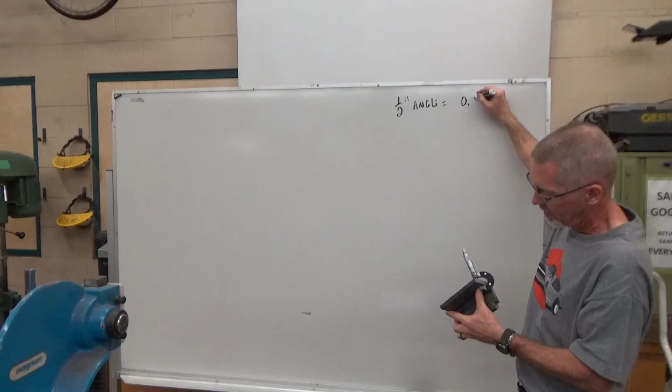It's 0.512, so it's a little bit bigger than half inch. If you measured with a ruler, you'd say that's a half inch, and if you're just welding stuff together, consider it half inch. But if you wanted to machine this, it will not fit in a half inch slot because it's too big.

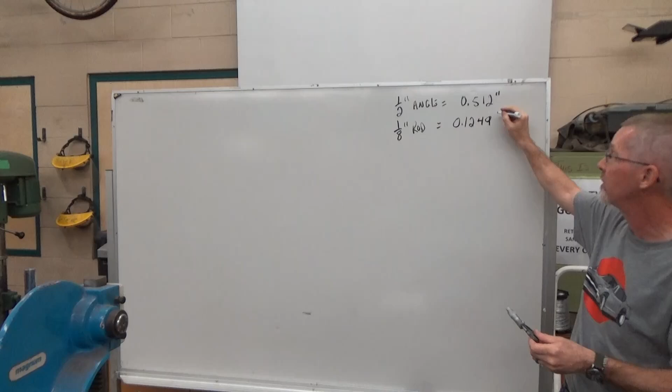So if I'm measuring this, oh man, despite having an anti-rusting kind of copper coating on this, so this is 1/8 inch rod, and it measures to be 0.12... oh man, if I go to decimal places, 4, 9, so almost 0.125. It's just a hair smaller. It'll probably fit in an 1/8 inch drilled hole fairly well.

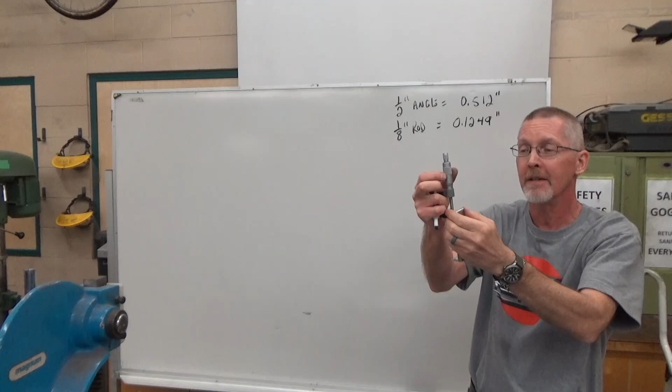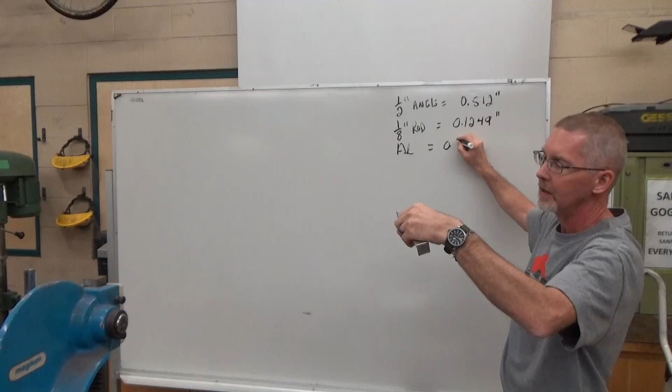Got a piece of soft jaws. You guys remember making the soft jaws in metalwork level 1, if you took metalwork with me. Put this on here, we'll see what this is. This, I think, is 90 thousandths, and it measures... no, it's 75. Okay, so aluminum, we got 0.064 apparently. 50, 64, okay, a little bit smaller than I expect.

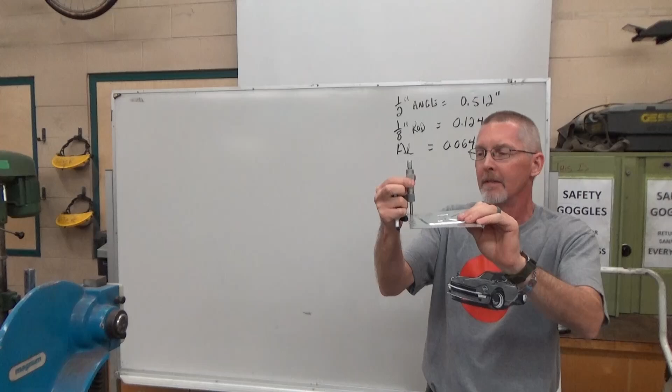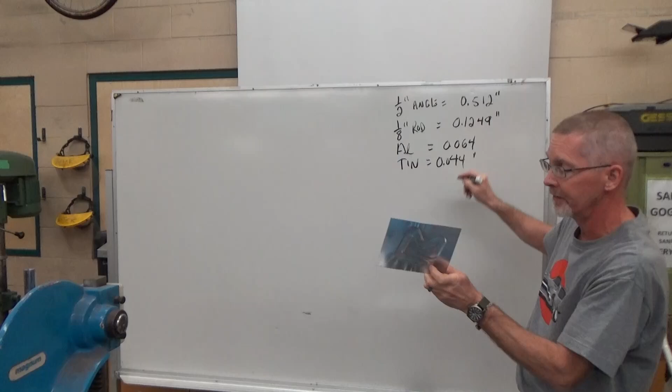Got a piece of tin, same stuff from the pencil case that you might have made in metal 8 or 9, depending on what grade you're in. Let's see what this one is. And this is 25, 35, 40. So tin, 0.25, 30, 45, 044, assuming I'm measuring that correctly.

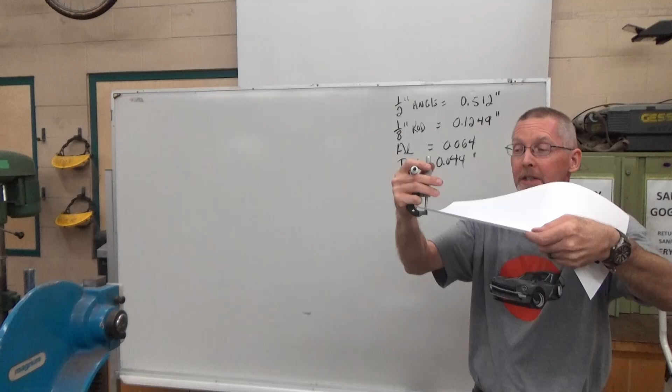Let's check this piece of paper. Paper seems pretty thin, can we measure it? You gonna be able to measure it accurately with a ruler, the thickness of this piece of paper? I think not. And this is 0.003. Now, there's high quality paper which might be thicker, and there's probably some thinner paper that's not so good quality. 0.003 of an inch, okay.

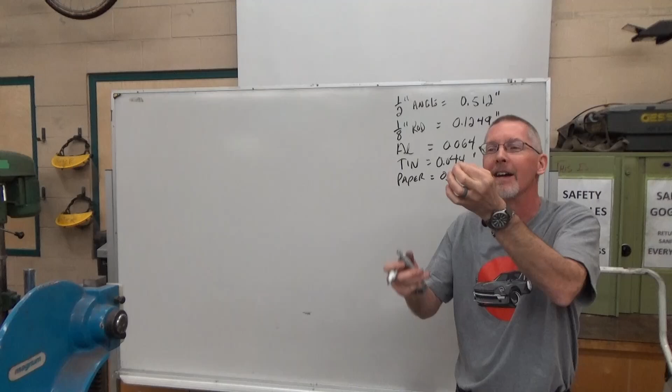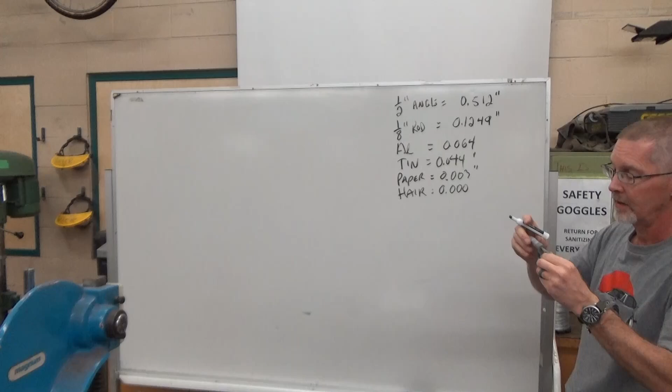Hair from my head. Oh, that is a small one. 0.000... unless this thing is not accurate. Seems pretty small. I'm not sure, is this thing even zero? Oh, this is actually off a little bit, my apologies. So that's 0.0013. Now, we want to measure, or we want to understand how this thing is going to work.

Before we get into that, let's take a look at these numbers. Oil clearance is inside your engine. When your engine's running, you can't have pieces touching. There has to be a little bit of a space, and we're going to cushion that with oil. We need to have some kind of space.

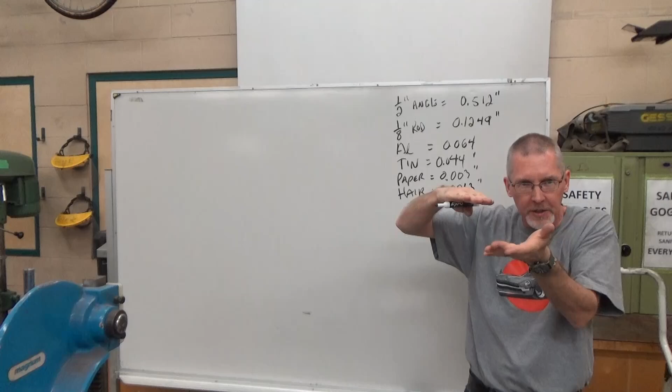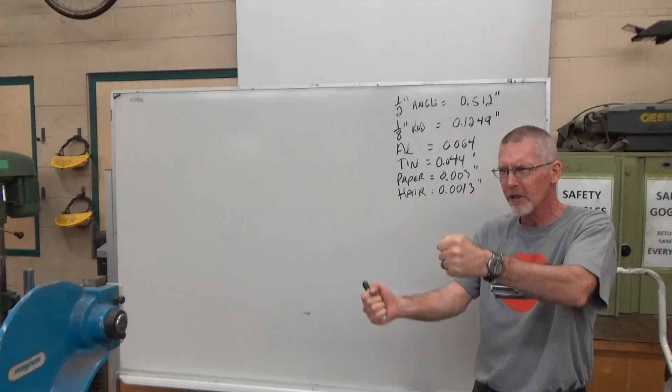Who's got a driver's license and has driven in the rain and hit a puddle that's a little bit uncomfortable? Have you guys experienced hydroplaning? So you're ripping down the highway, you hit a puddle and your car goes woo, and your butt just kind of puckers right there, right? What happens is your car's going fast enough, the water starts to build up under the tires and it lifts the tire off the ground. You have not experienced hydroplaning like slicks in a puddle of water, because it's like if you snowboard and get that fresh powder nobody's ever been in and it's like riding a cloud. That's what hydroplaning and slicks is like. You just suddenly go sailing away, and you wait until you wash ashore, figure out where you beached, and try to get back on track. It is sketchy.

So keep an eye on your tread of your tires, make sure you have tread that gets the water out of the tread.

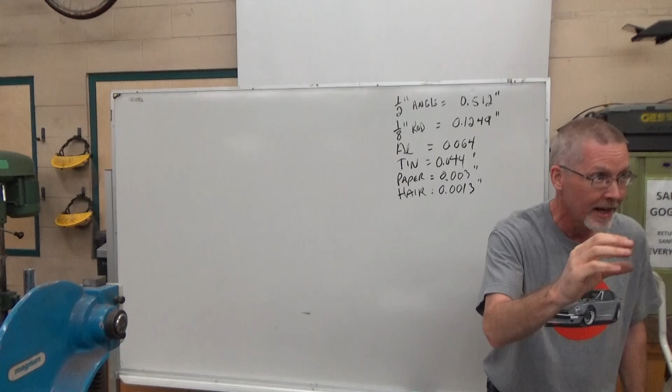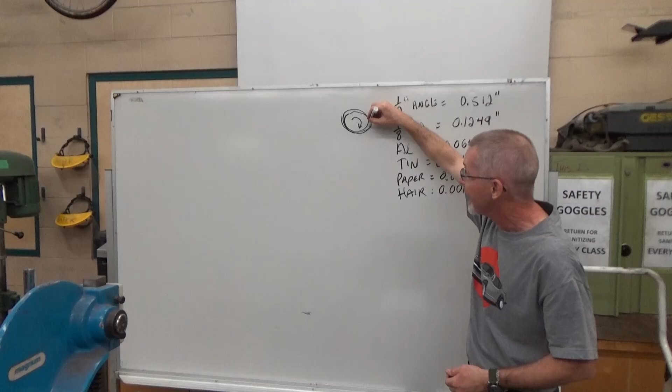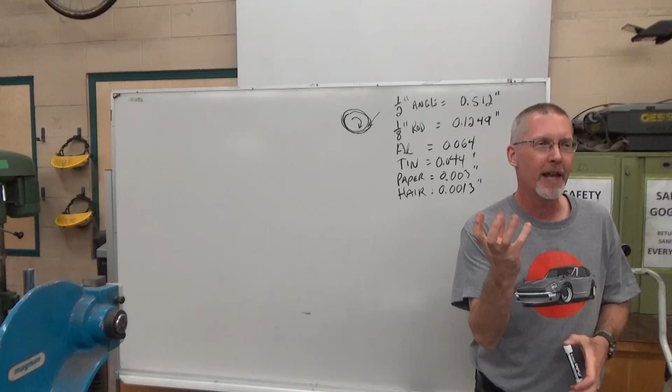Inside our engine, things are essentially hydroplaning. You'll have a shaft that is rotating, and it needs to fit somewhere. Inside here, we want to have some oil, so the whole thing hydroplanes on a coating of oil inside the motor. That's what we're shooting for. If that gap is too big, we don't have a good oil cushion and it may not hold the oil in. If it's too small, things can go wrong.

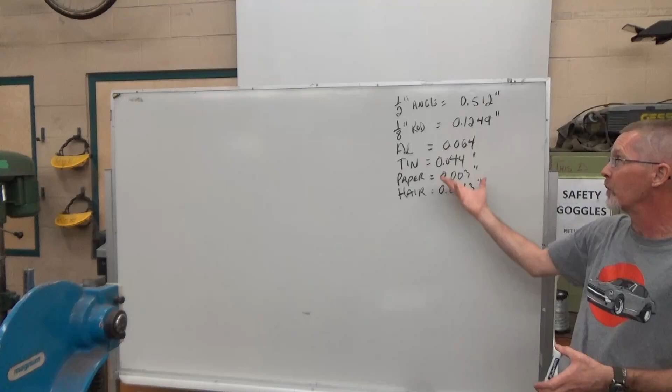For you guys in level 1, how big do you think the thickness of that oil cushion inside the engine could be? We've got a bunch of different guesses. How big are those oil clearances inside a motor? Around the thousandths of an inch. The oil clearances on engines are in this ballpark, 1.5 thousandths or so.

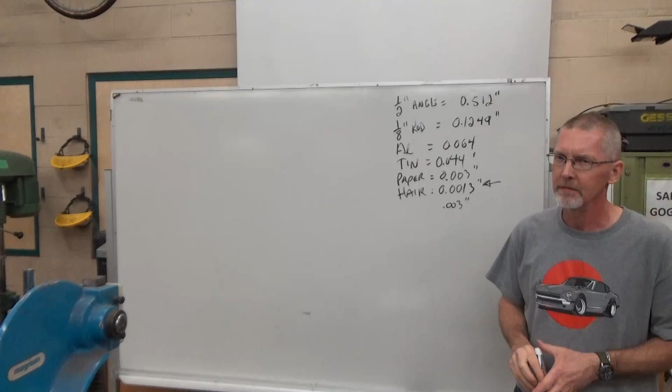In the world of old school Chevys, 0.003 is junk, it's kind of done, it needs a rebuild. In the world of Dodge, even old school Dodge, which surprises me, what's a little bit tight for a Chevy is like kind of loose for a Dodge, which is a little bit weird. And Japanese vehicles have a little bit more fussiness.

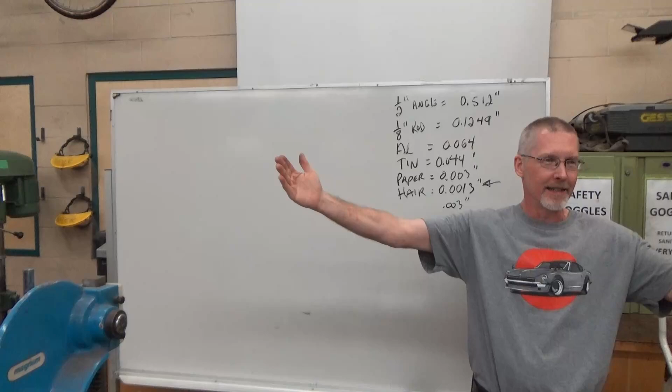If you talk to Riga, he used to have a Lada, a nice Russian Jeep from way back. He took it to a mechanic, and the mechanic said, look at these specs, normal vehicles this is too tight, this is too loose. And Lada's like, she's good, man, put vodka in there. It's amazing.

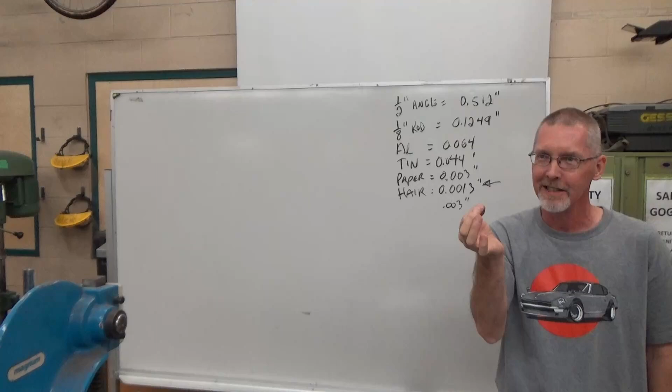So this is kind of what it wants to be. The hair on my head is about the thickness of the oil clearances inside our engine, and all of a sudden that doesn't seem like a whole lot. So you want to be changing your oil on a regular basis so you don't get crud and carbon plugging up those spaces inside the journal.

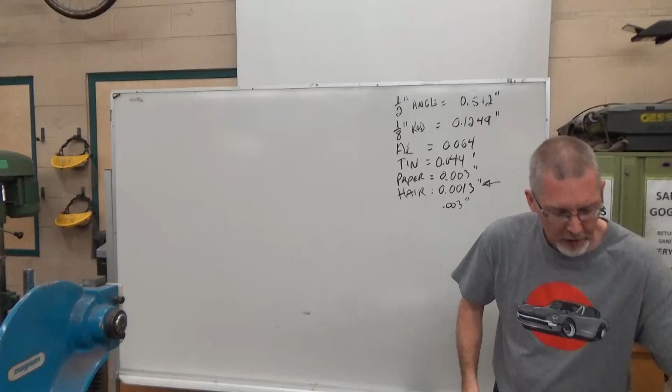So we want to learn how to read this beast, which seems sketchy, but we're going to make it work for you, as soon as I can figure out how to erase this. Here we go. All right, reading the micrometer.

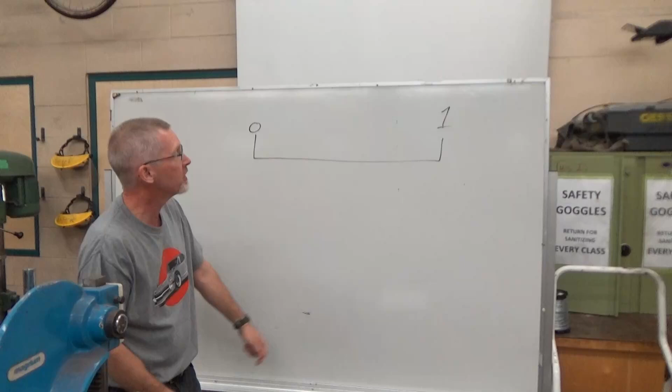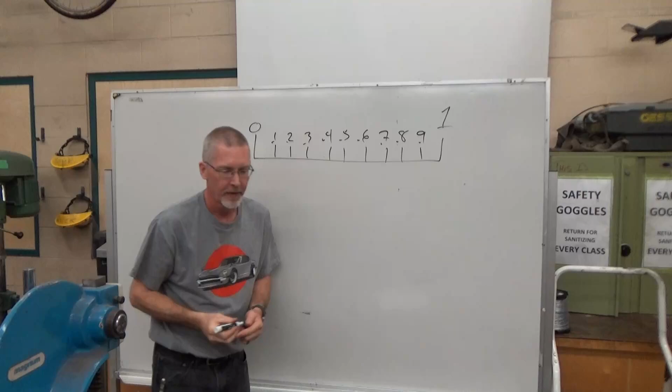We want to measure from 0 to 1 inch. We don't do fractions, fractions suck, a lot of people have problems with fractions. So we're going to do this in decimals because I hate fractions. Decimals are nice. If I was splitting this into decimal, it would be 0.1, 0.2, 0.3, 0.4, 0.5, 0.6, 0.7, 0.8, 0.9.

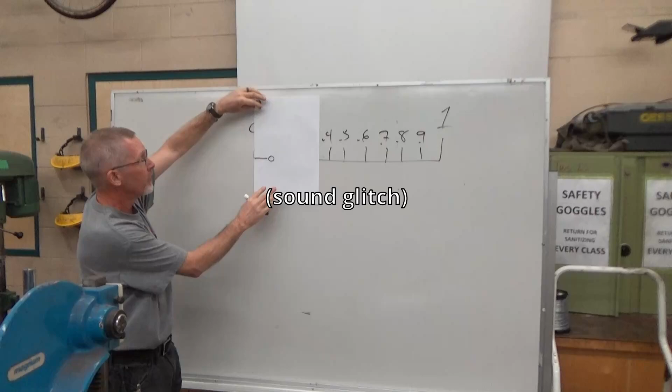Now imagine this is my fancy, engineered measurement tool. I put a line here and say 0, and I line up this 0 with this 0 and everything's lined up, I've just measured 0. If I pull this back to here, I've measured 0.1. Pull it back further, 0.2. And further, 0.3. With me so far? Okay, nodding heads, awesome.

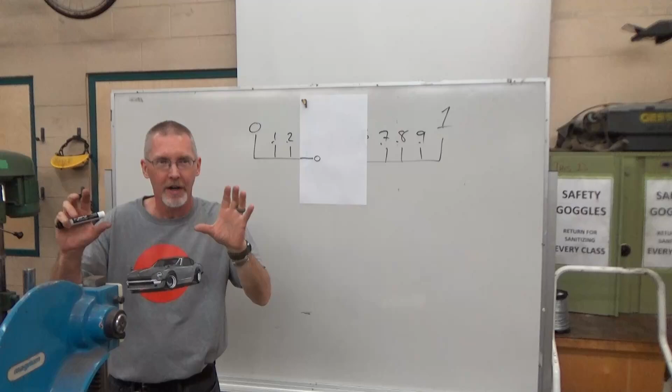But what if I'm here? We don't really want to estimate, estimating is for art, we want stuff to be more precise. So we've got a problem with this. What we can do is add some more lines in here, and I can split this up like so.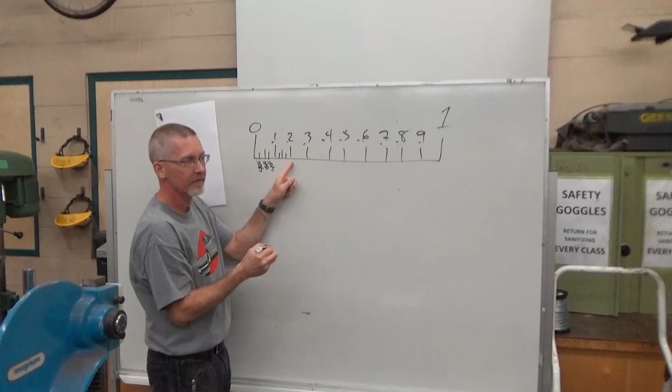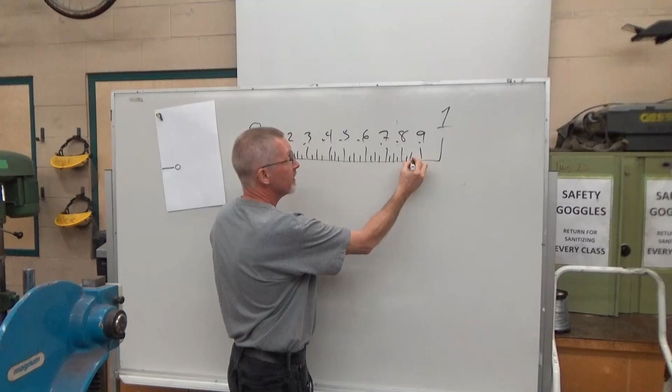This will be 0.025, this will be 0.050, this will be 0.075, 25, 50, 75, 0.1. Make sense? It's like money, right? 25, 50, 75, a dollar. Here it comes, 25, 50, 75, a dollar, over and over.

So now, if I'm here and I measured 0 lining up with 0, and I slide it over to here, I just measured 0.025. If I slide it over here, 0.050, about the thickness of the tin. If I go over to here, 0.075, then 1, 125, 150, 175, 2. With me so far? This is easy.

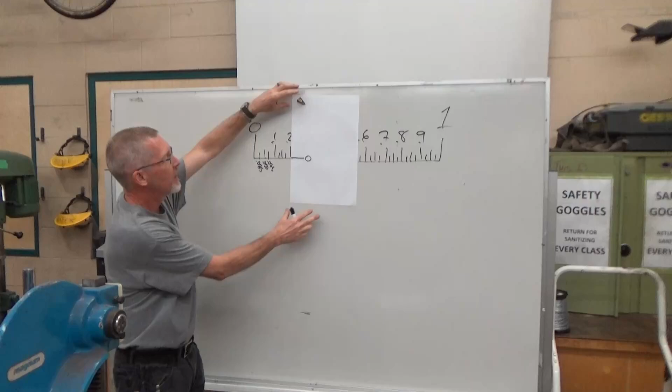Now it gets interesting. That's sweet, but what if I'm not here, but somewhere in the middle? Well, we could...

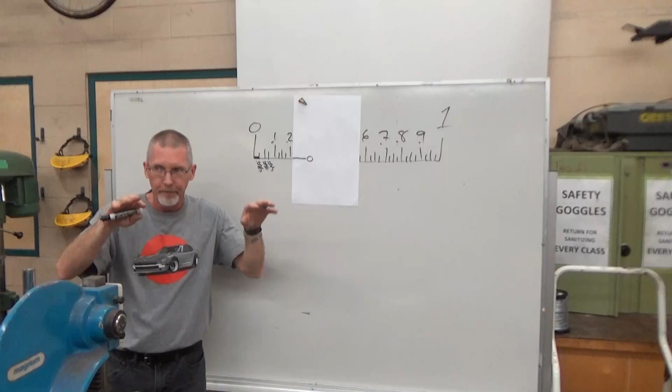Well, it's like 25 thousandths, so I could split that up into thousands, right? So I could go like this: 1, 2, 3, 4, 5... up to 25. But your head would explode, it's too much. It's too hard to see, especially on something this small. I'm not going to be able to see 25 little tiny lines in a space of 25 thousandths of an inch. I'm not that good.

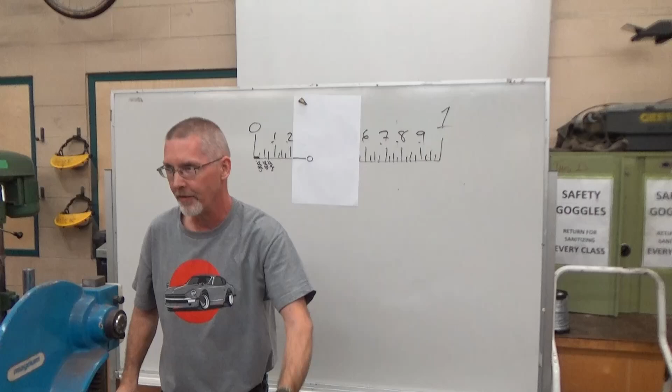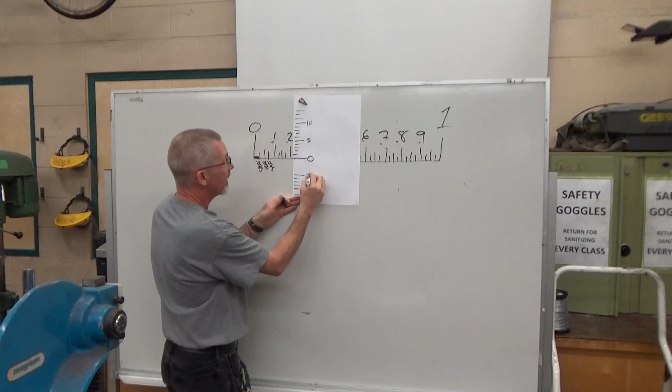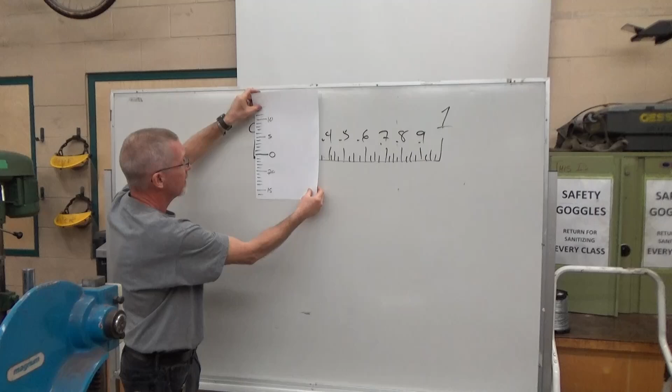So instead, we're going to take those 25 lines and put them on this. So it'll be like 1 through 25. Now, instead of sliding this thing back and forth, we can make this thing so it's wrapped around like so, and the 0 would line up. And if I turn this and thread it, I design the thread such that one full turn would bring me to 25, so 25 lines have gone by. It's like we took this and put it on there so that I can frickin' see it. Not fricassee it, that's cooking. This isn't a cooking class.

So if I'm at the 0.025 and then I rotate it around one full turn, 25 lines have gone around. Now I'm at the 50. So if I go to here, I'm definitely past the 0.050 and I have 5 more, so I would have measured 0.055. Does that kind of make sense?

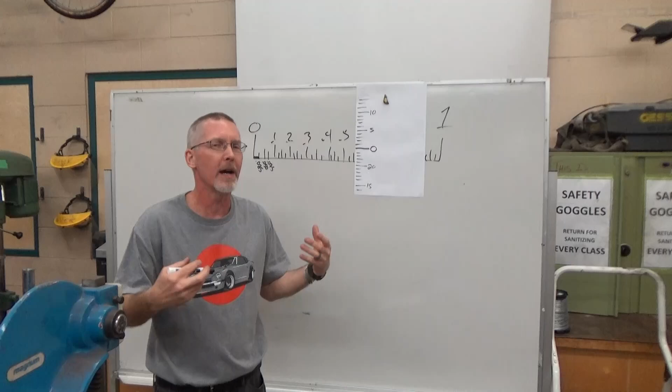Okay, so if I go over to like here - and when I was in my apprenticeship training school, I was not good at simple math. I'm still not very good at simple math, so I had to write this stuff down. So I go, okay, I'm definitely past the 0.5. And you want to do 3 decimal places - we're giving them to you, use them all, even if it's 0, put frickin' 0. So I'm definitely past the 25 and the 50, and then I got 21 on the dial. 0 plus 0 plus 1?

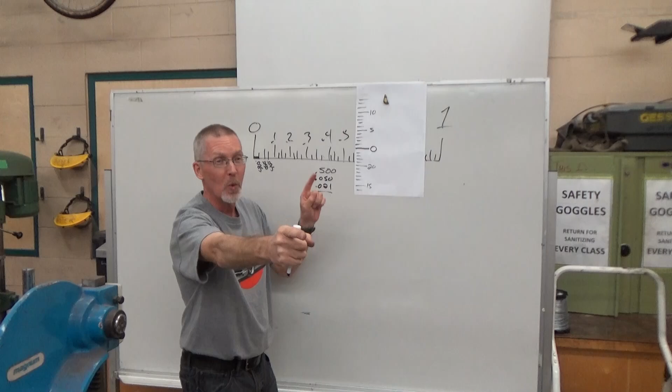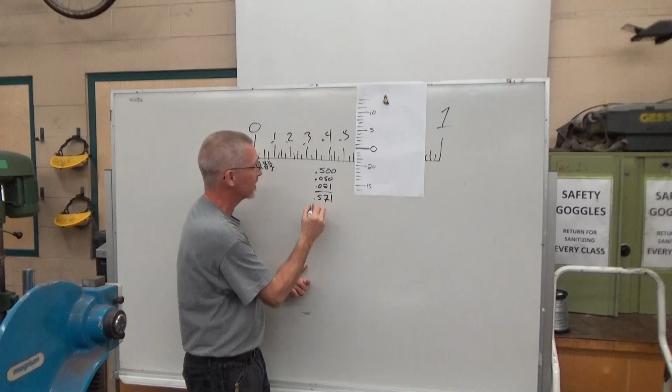Okay, good, good. 5 plus 2? Oh man, that's still slow, but not bad. 5 plus 0 plus 0? 5. Oh man, both in stereophonic sound. So it's 571 - that's our measurement there.

If I go over to here, let's go to this one. I'm definitely past the 0.7. I used to have to write this down and add them up because I could not do it in my head. I've done it enough over the years, I can do it in my head now. Some of you guys can probably do it in your head, you've probably already got it in your head. That's a 0.75. Close, I'm definitely past the 0.7. Got it - 25, 50, 75.

I just know like you wrote 0.7, or you're supposed to write 0.75 because it's 3/4 of the way across. Well, not yet, it's a notch. This is the 025 line, like this one, and then we got the 050 and the 075. So I'm going to write it down, unless that's what you meant. But I'm definitely past the 75 line, and I've got 4 on the dial.

So 004. 5 plus 4? We're getting quicker, I like it, awesome. 7 plus 0 plus 0? Nice. 7 plus 0 plus 0? Still 7, awesome. So we get 779.

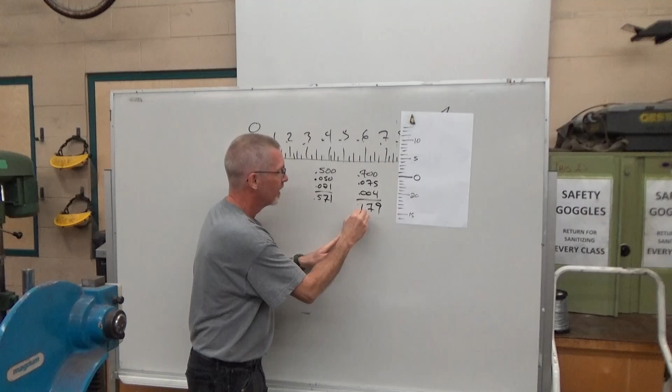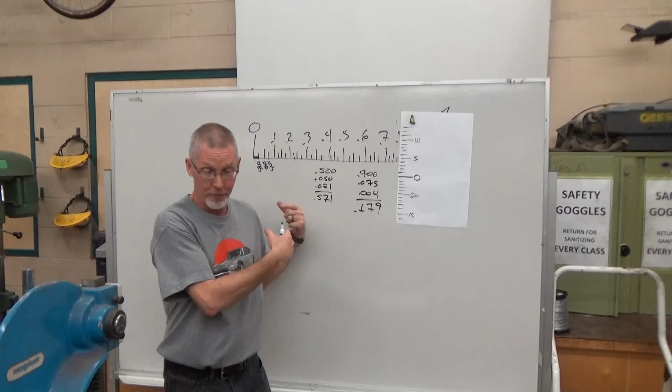So close to 0.75. And if you're a woodworker, if you cut it at 0.75, it'll work. If you made your crankshaft this size and it needed to fit in the proper size, it's not going to work - it's got to be exact. Let's try one over here, and we'll go to this one.

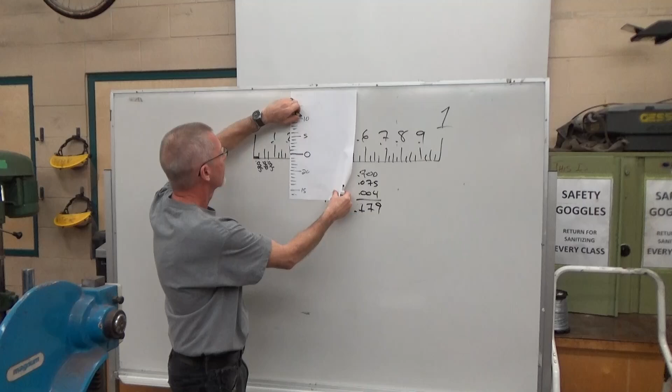Actually, no, I want to do this right there. This is a tricky one, haha. We have to make a call here. It looks like we're past the 0.2. If I'm just past the 0.2, I'd expect small numbers, but if I'm almost at the 0.2, I'd expect big numbers in here. I'm messing it up like this, let's try that.

Okay, now let's test it and see. Checking for comprehension.

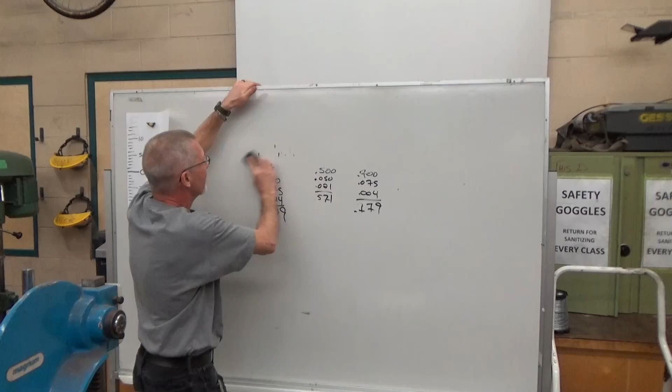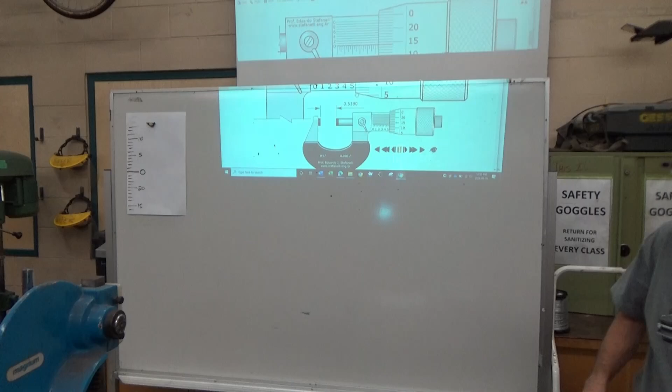All right, for that I need to do this drawing like this. Oh, all right. Oh, shoot. I moved this earlier, I'm going to move it again. Pew, dink, and I want to do this. Pew, boop. All right, so now I'm going to turn this. Come on, boy.

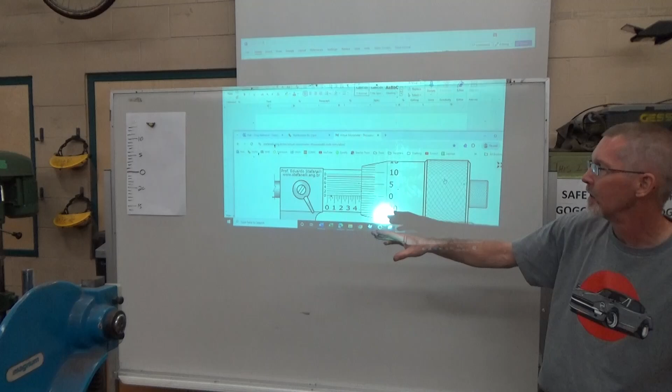I want to try to get it right on a line here. Come on. All right, so pretend that this 0 is lining up. Just pretend that it's lining up, because my big clunky sausage fingers can't do this. So I'm very definitely past the 0.4, definitely past the 25, 50. If that 0 lined up exactly, I'm on the 075 line. And then in theory, there's nothing on this. So then it's 0.475. That's pretty straightforward.

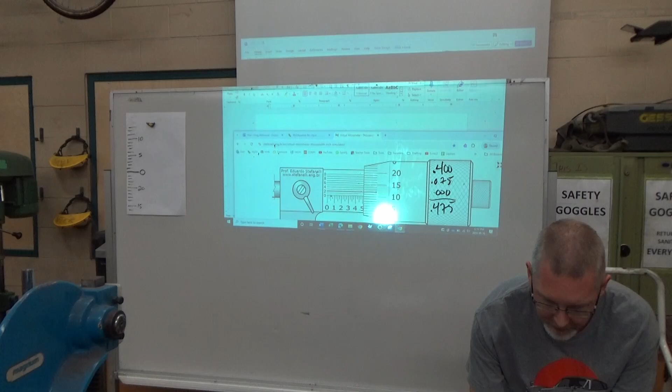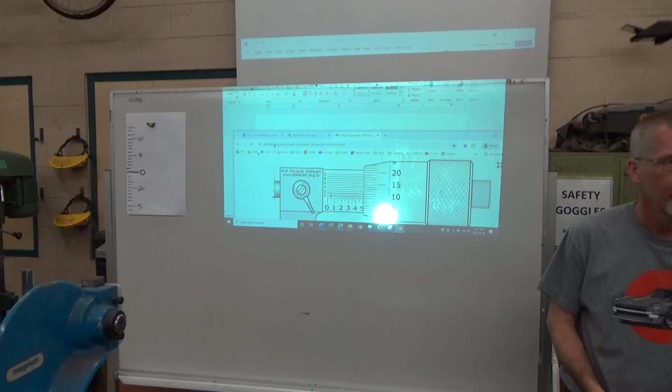Okay, someone from level 1, if I can get this to line up for you. Come on, come on. Oh. All right, pretend that the 10 lines up. Let's pretend it does. Someone from level 1, what is this reading? What measurement we got here? Yep. Yeah, because you got 0.5. There's no 25, 50, or 75. If it helps you, you can put zeros. And we got 10 on the dial, so that would be 5, 10. Nice, a Datsun fan, I can tell.

Okay, let's try somebody else from level 1. This one. We got it right on the button. Somebody else from level 1, try this one. Yep, 571.

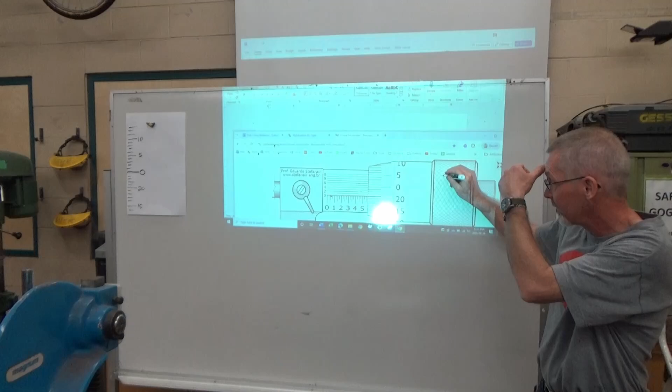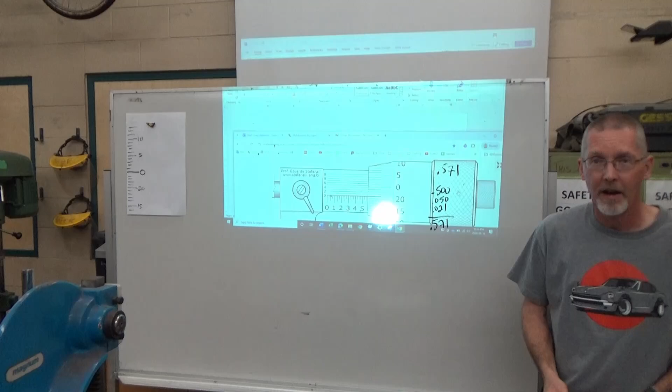5 what? 0.571. So I'm definitely past the 0.5. I got 25, 50. I'm not quite at the 75, so I definitely have 50 in there. And we got 21 on there, so yeah, 571. Yes, awesome. You can do this in your head, I'm impressed. Not my skill. Okay, somebody else from level 1.

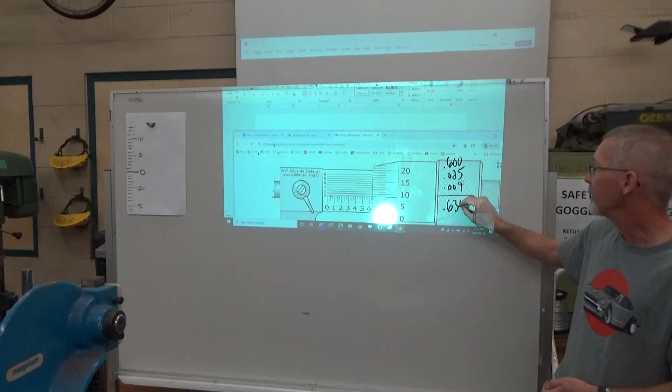Let's see if we can get this one to line up nicely. Let's pretend this guy lines up. Someone else from level 1. Yep, 0.635. I got 0.6, I got 25, and this looks like a 9. I know they darkened up this, they put a red on the 10, but I would say the 9 is lining up with this, which would be 0.634, I think. If the 10 was there, 635. Absolutely, this particular one can go to 4 decimal places. So we're like a teeny fart over the 9, and you look for which one lines up, which would be the number 1. So it would be 0.6341. If you wanted to go to 4 decimal places, we don't have to, but you can.

Okay, we'll do one last one and call our quits. Again, someone from level 1. This one. Someone new from level 1.

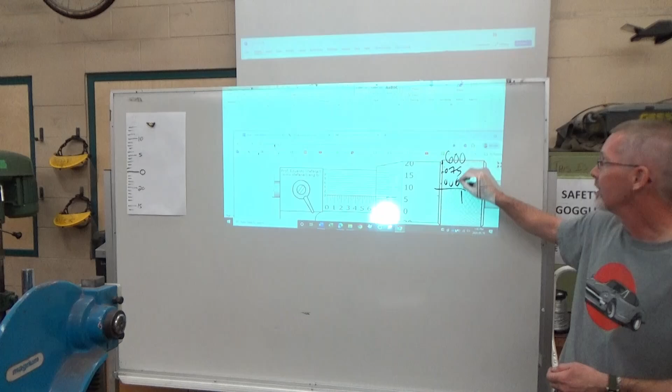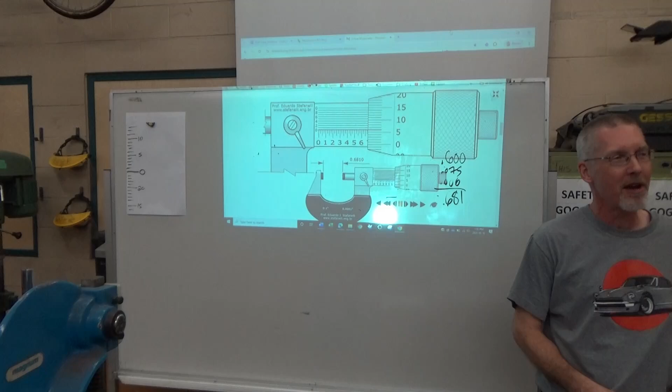Chance, what number are we definitely past? Okay, so we're definitely past the 0.6. I can see the 7 just peeking around the corner, but I'm not there yet. Stops at 5, so we're definitely past the 0.075 because I got 25, 50, 75, and then this number 6 should be 7, 8, 681. Let's see if we win, because they give us the answer, which makes it easiest to teach. So yeah, 681, you got the right answer. Sounds like you got this thing down pat, so that's awesome.

I have a joyous worksheet that I'll be handing out to you, and we'll go through them as best we can. One side goes 3 decimal places, the other side you're going to estimate to 4 decimal places, and we'll check our answers in class. Okay, so I'll go get those worksheets, and let's give it a go.